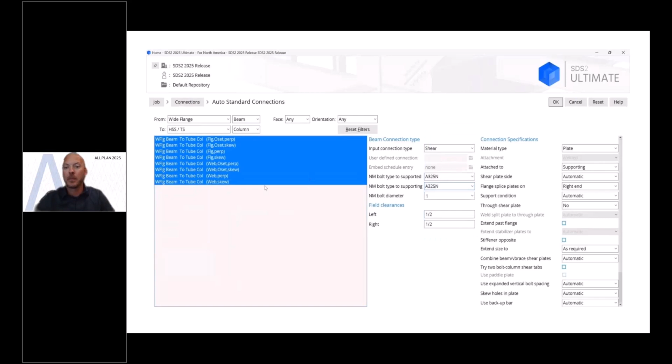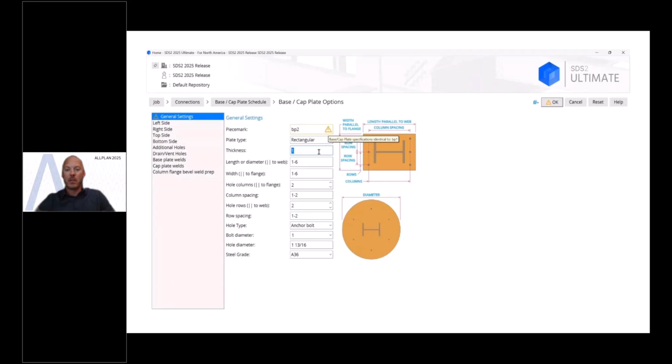Our base cap plate schedule now provides images for reference to make things more intuitive, and SDS2 now provides visual feedback when validating fields rather than pop-up windows that tend to interrupt your working.

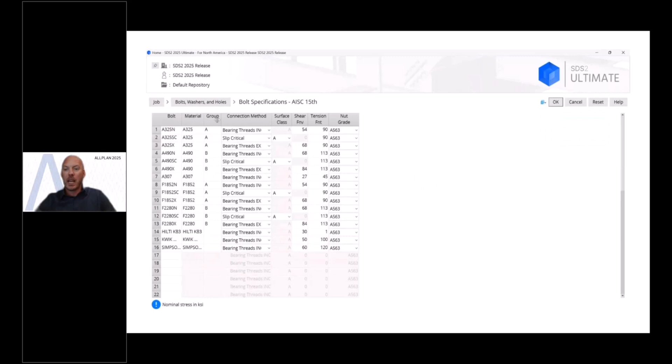Many areas of project settings have removed restrictions for more flexibility. One example is the number of bolts and length of bolt names, allowing you to add any bolt from any manufacturer. Forms can also be added to make sharing and copying project settings a breeze. Shapes properties is also now embedded, again increasing performance and providing intuitive filters and visual validation.

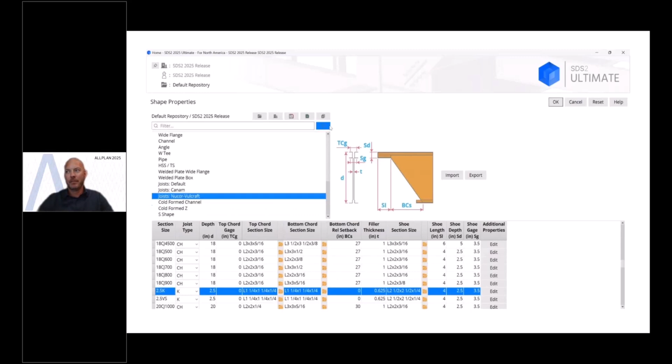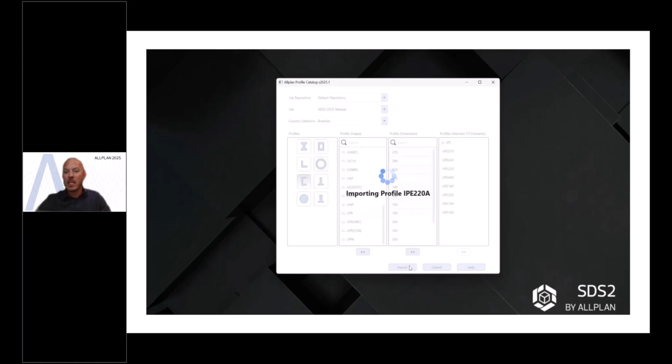With a separate small application, SDS2 imports profiles from the Allplan Profile Catalog, an open database of profiles hosted on Allplan Cloud. Profiles from across the globe are available to expand the reach of SDS2's steel detailing capabilities around the world. Filtering, searching, and intuitive selection lets you find the profiles necessary for your project needs. You can see the profiles are brought into SDS2 with all their attributes ready to begin modeling.

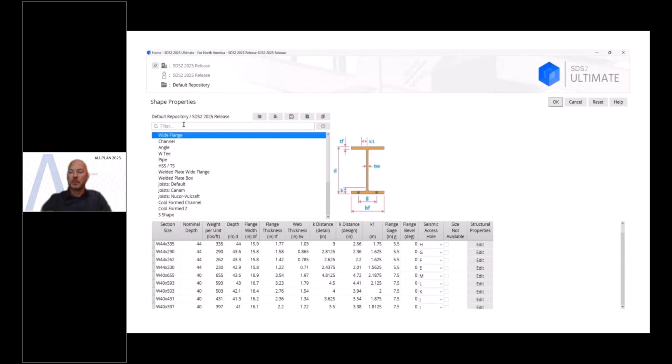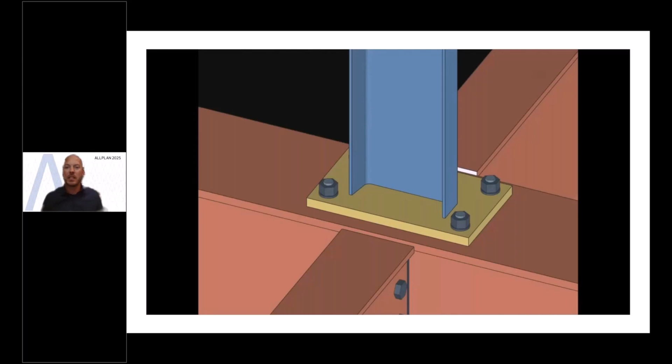Modeling enhancements include huge improvements to the number of connections that can be automatically created by SDS2. Previously, material types, loading conditions, and material orientations that were outside the scope of SDS2 connection design could not be forced. That is possible today.

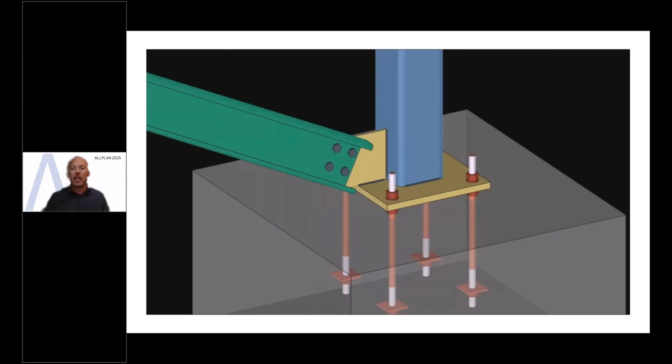By focusing on these areas, SDS2 will now create connections for angle, channel, WT, and any material it previously would not for beams and columns. Your time savings from this development are tremendous. As a detailer, we understand projects many times require you to simply match the engineer-driven design, and this gives you exactly that capability.

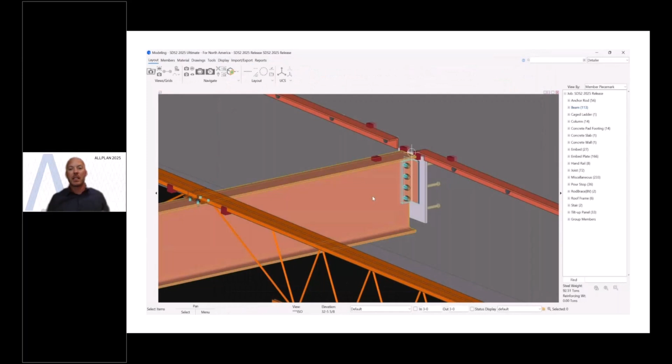Also related to connections is steel framing to concrete situations where the performance has been drastically increased, in some cases by up to 75 times faster. SDS2 also provides more flexibility to ship connection materials in the shop or ship those loose.

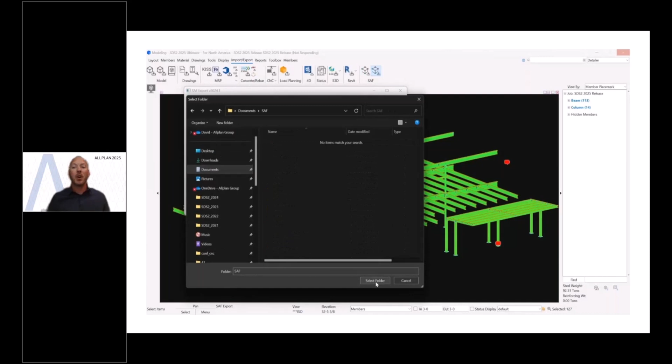Workflows between engineer and detailer or fabricator get an upgrade by implementing the Structural Analysis Format, or SAF. This open Excel-based file format is supported by Allplan products, SCIA and FRILO, along with more Nemetschek Group products, RISA and ArchiCAD, as well as many others outside of our close Nemetschek Group. In this demonstration, we see an SDS2 model seamlessly transferred to SCIA for analysis and design of the structure.

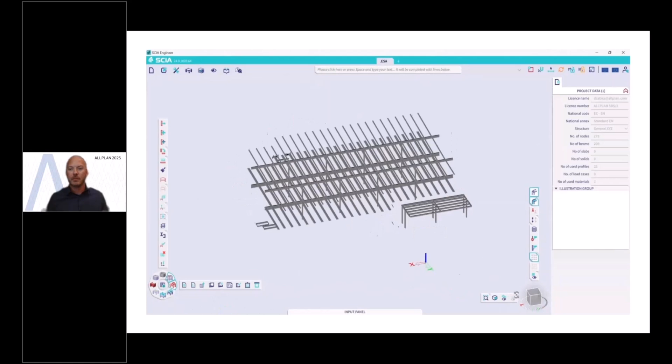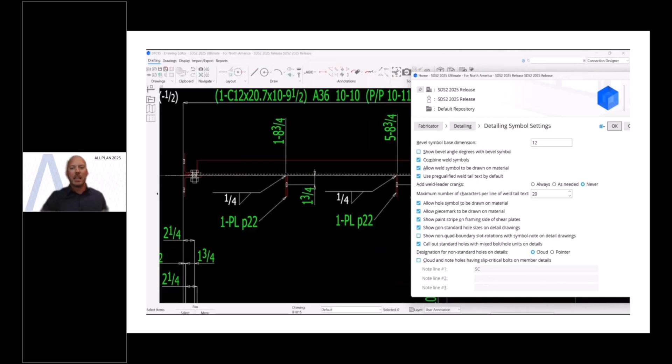And don't forget about the small improvements throughout SDS2, including P-loops for grab bars, options to never add weld cranks, and a simplified solution stack and installation process, making onboarding new and old users alike simple. All right, Kelsey, back to you again.

A big thank you, David. It's great to see the new features and functionality that SDS2 2025 will provide. Before you go, I have a few more questions. David, what do you like most about the latest version of SDS2?

Yeah, it's difficult to single out one thing that I like most. We've developed new features and enhanced several existing features based on feedback from our users. Their satisfaction is what I will enjoy the most.

That's great to hear. How can the functionality you showed today have a positive impact on the work of detailers? Ultimately, a detailer's job comes down to productivity. Increased performance, reduced rework, less time spent creating connections, and enhanced workflows with engineers all increase that productivity.

It's amazing to see the clear and long-term vision we have for SDS2 by Allplan, especially for 2025. Thank you again, David, for presenting today. We're looking forward to hearing from you again soon.

Thank you, Kelsey, for these excellent sessions.